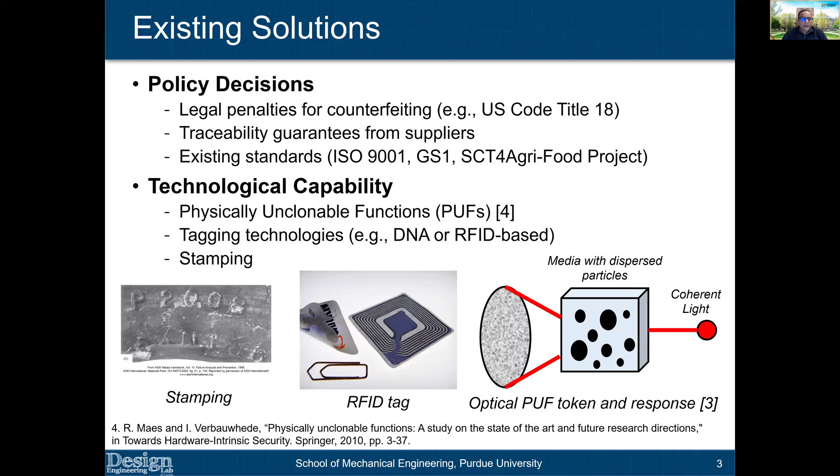The other approach for addressing this problem is more technological. For example, there is this notion of physically unclonable functions, which are functions that cannot be replicated or remanufactured even if we wanted to. Even if we knew exactly what the microstructure of the part is, it is extremely hard to replicate that microstructure exactly. Such an approach can be used to address this problem of counterfeiting.

Specifically, we focus on additive manufactured parts. Recently there has been a lot of work to understand security in the context of additive manufacturing. There are a number of different concerns, for example piracy of CAD files, piracy of process plans. There are issues with sabotage, and of course counterfeiting. There is existing literature on a complete taxonomy of the kinds of different attacks possible within the additive manufacturing domain, and our work fits within this literature.

Specifically, we focus on two areas. One is watermarking, where we add some sort of information inside the part. For example, in the case of images, we can watermark JPEG files. In terms of audio, we can watermark audio files. The second is fingerprinting. These two are related approaches for addressing counterfeiting.

The idea of embedding or hiding information in objects is not new. This has been researched a lot within the digital artifact community. For example, audio watermarking is very common when you purchase MP3 files from the Apple Store or any other online store. Similarly, watermarking of images is a well-established technology, and we can embed signatures within images.

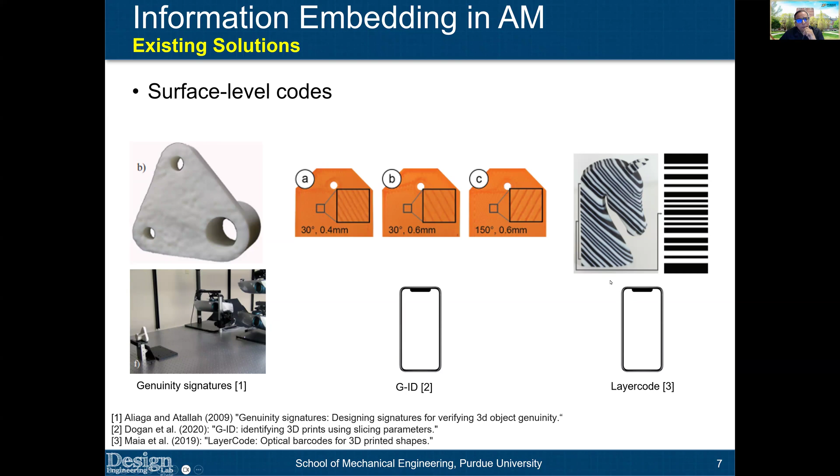Similarly, there are other approaches where we can embed QR codes or barcodes using different materials within the part. There are other techniques where we can embed codes inside the part so they're not directly visible from outside, but through techniques such as scanning or audio-based methods, we can identify which specific code has been embedded in the part.

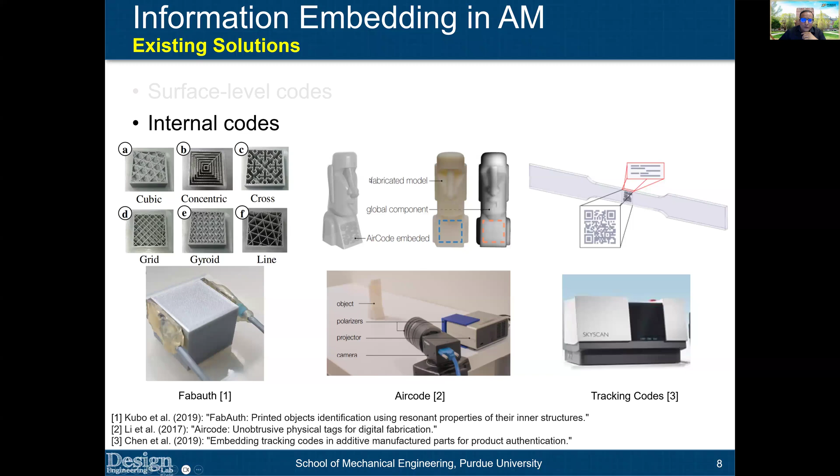So along these lines, our approach is to use the manufacturing process to embed such information within parts. Some key challenges in existing approaches are that modifying the structure of the part inside it also affects its properties. We want to make sure the embedded information doesn't affect the functionality of the part, and that embedding it doesn't require any modifications or extra steps in the manufacturing process.

Considering these two objectives, our primary task in this paper is to define an efficient and reliable scheme for embedding information, and to figure out how to maximize the amount of information that can be embedded inside the part. We refer to this maximization as the information capacity of the part, considering the process capabilities and how the part will be used in real usage.

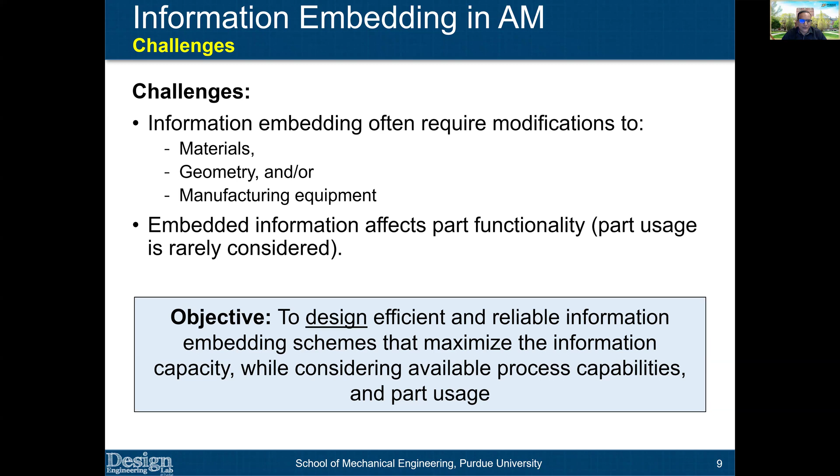Our proposed approach is to use manufacturing process control, particularly additive manufacturing process control, to achieve information embedding. We view information embedding as a noisy channel coding problem, similar to how it's used in information theory, where we think of the part as a carrier of information. The information is embedded when the part is manufactured, and we read that information later, maybe after manufacturing or after the part has been used for some time. We think of the part as the channel carrying that information.

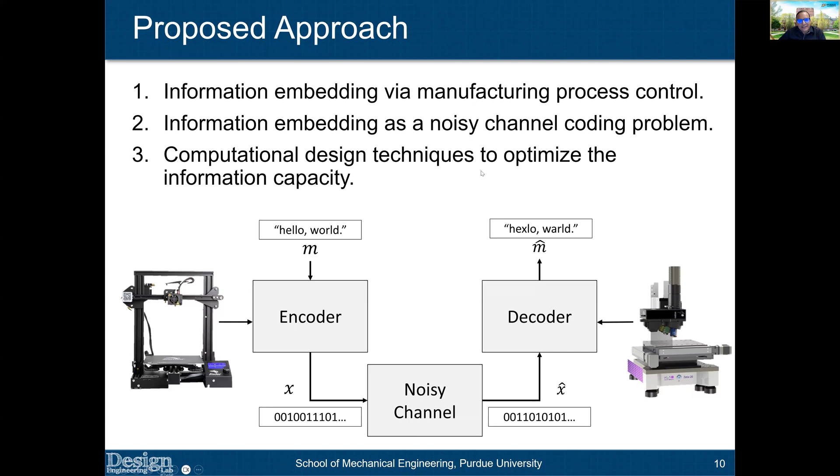When we embed some information, let's call it message M, we want to read that message later, but it may get modified during manufacturing or usage. So we try to maximize the probability that we can read the same information that was embedded earlier, since there may be different effects during usage that modify it. Finally, we want to come up with computational design techniques to optimize the amount of information the part can carry.

Our proposed approach starts with a CAD file, then decides what information to embed. Specifically, we look at embedding information on the surface of the part in the form of either barcodes or 2D QR codes. That information is coupled with the manufacturing process plan, for example a G-code, to update the G-code in a certain way. That updated G-code is then sent to the additive manufacturing equipment, and we print the part.

This process of going from the CAD file and adding that information is referred to as the information encoding step. Once the part has a certain signature embedded in it, we go to the decoding step, which could use optical scanners, profilometers, or many other different ways to read the embedded information. We show how image analysis can extract the message, and what sources of uncertainty come up in the process, and how we account for that uncertainty to figure out the maximum information content of the part.

If we're able to put some information in during the encoding step, and we're exactly able to identify the same information in the decoding step, then there is no error in the entire process.

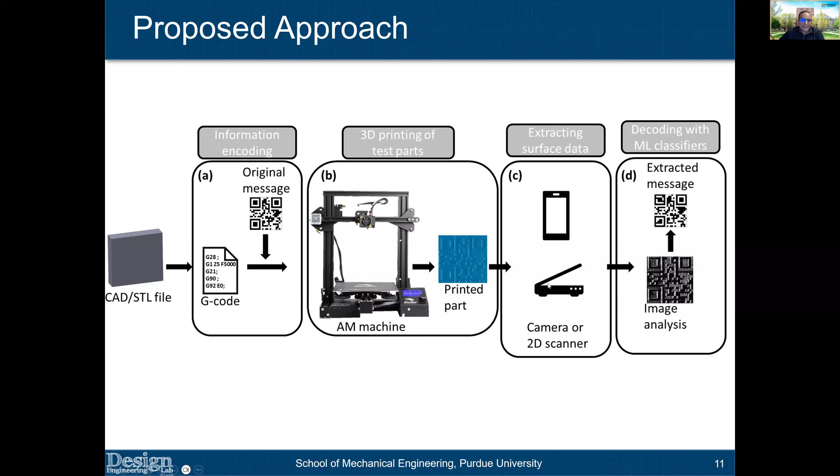Let's say the information capacity is 1, which means I put in a bit, 0 or 1, and I receive the same bit out. However, if there are any errors in the manufacturing process, or in the decoding process, that bit 0 may be read as 1, or a bit 1 may be read as 0. This error may reduce the capacity we can have in that part, so we want to quantify what that information capacity is.

Specifically in this paper, we use the speed of the head as a way of embedding information. If you look at this example part at the bottom, there are two different types of features you would notice. One is shiny blue colored, and the other is some rough surface. We achieve these kinds of patterns by speeding up the head in certain parts of the printing process.

And then slowing it down in other parts. When we are speeding up, we get one type of feature, and when we are slowing it down, we get another type of feature. These two phases we refer to as bit 0 and 1, and that's how we achieve this information embedding of the bits of 0 and 1. Our approach here is using speed of the head.

Now, there are various other ways in which we can achieve different types of signatures. For example, in some of the prior work, we have used vibration motors, where we activate the vibration motors attached to the frame at certain points in the printing process, and that induces certain types of signatures. So there are many different ways in which we can achieve different features and embed information.

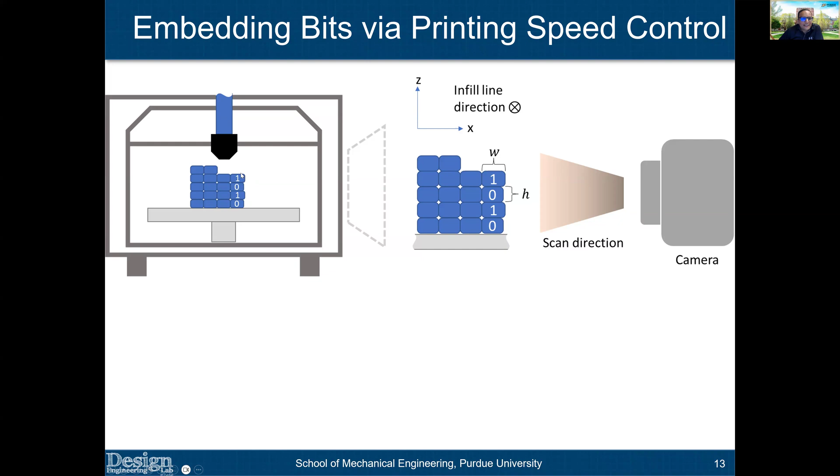So in this particular paper, we focus on speed as the variable. This is another depiction of how or where that information is getting embedded. On the right-hand side is the surface of the part that is getting printed, and when we slow the machine down, we get this larger bead size. This figure shows the effect of speed on the size of the bead.

So for example, when we slow it down, we get this bit 1. But when we speed up the head, then we get this bit 0, which you can see in these experimental results. And that gives the surface a specific signature with the information that is embedded.

So our information encoding scheme consists of 5 steps. First is to generate the message. Now, this message can be just some sort of a binary string, or it can be any other type of alphabet—for example, hexadecimal—then we could come up with different ways in which you can embed information. But here in this paper, we only focus on binary strings.

And we focus on generating these randomly because we want to be able to embed any information that the designer would like to add to the part. Then using this, we determine what the encoding parameter should be, which means what should be the speed of the head which corresponds to bit 0, and what should be the speed of the head which corresponds to bit 1. We come up with the optimum combination of these two speeds, along with the width of each bit.

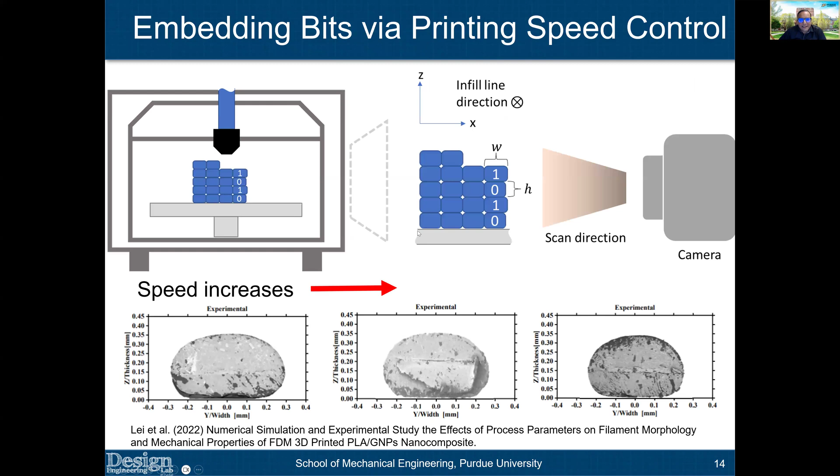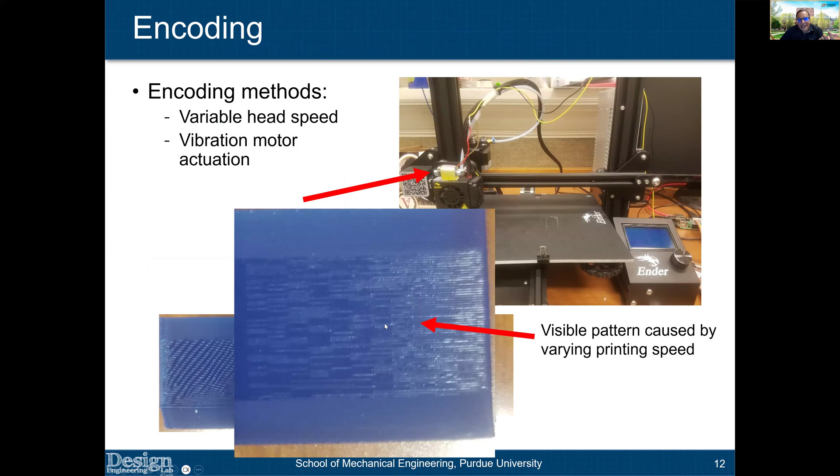So in this previous slide, for example, here we have this as the bit width. As you can see, that's the width we're using to quantify a certain 0 or 1, but that can be changed. We can have a smaller bit width or larger bit width. If we have a smaller bit width, then we'll have more information in the part, but if we have a wider bit width, then we'll be able to encode less information. The advantage is that the probability of reading that bit would be higher.

So once we choose the encoding parameters, the next step is to map that code to be embedded across different layers, and then modify the outer layer speeds for the G code, and then print the part. Here is one example of the kind of part that we could print.

So this is just an illustrative part to assess the impact of different speeds.

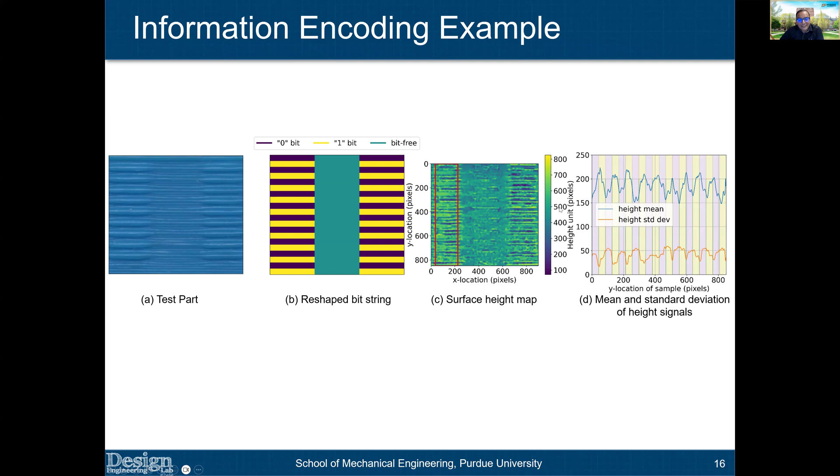In terms of the decoding process, again, as I said, we could use different ways. We have used a simple paper 2D scanner. We have used a camera on a cell phone. We have also used an optical profilometer to assess the impacts of different reading techniques. Clearly, different reading techniques will have different levels of error associated with them, and that affects how much information we can embed.

So the steps in the decoding process are: we start with the part, we scan it, and then we perform some image processing techniques such as noise removal, thresholding, and then we classify each point on the surface as either 0 or 1, or a misclassified bit where we are not able to decide whether it's 0 or 1. That is what is used to calculate how much error we have in the overall part.

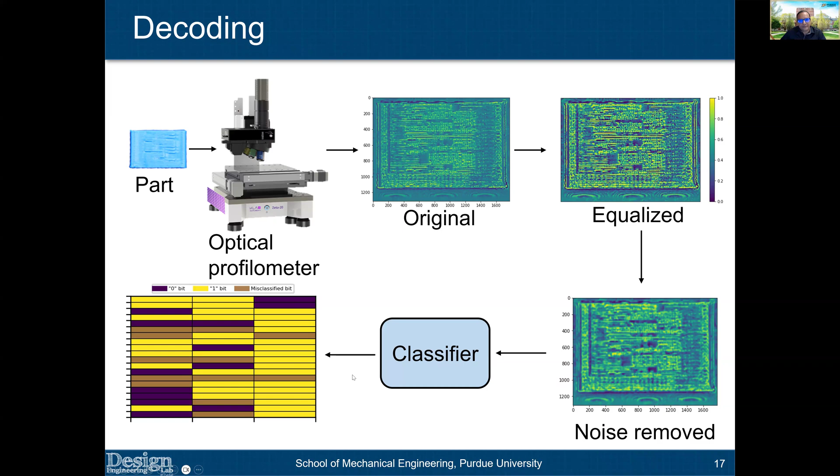To come up with the optimum values of the two speeds, we use design of experiments in terms of the different differences in the speed. So what really matters is not the absolute values of the two speeds for 0 and 1, but the difference between the two speeds. The higher the difference, the more likely we are able to characterize the bit accurately. And the lower the difference, the lower will be the difference in the surface profile for the two regions, and then the higher the error in that.

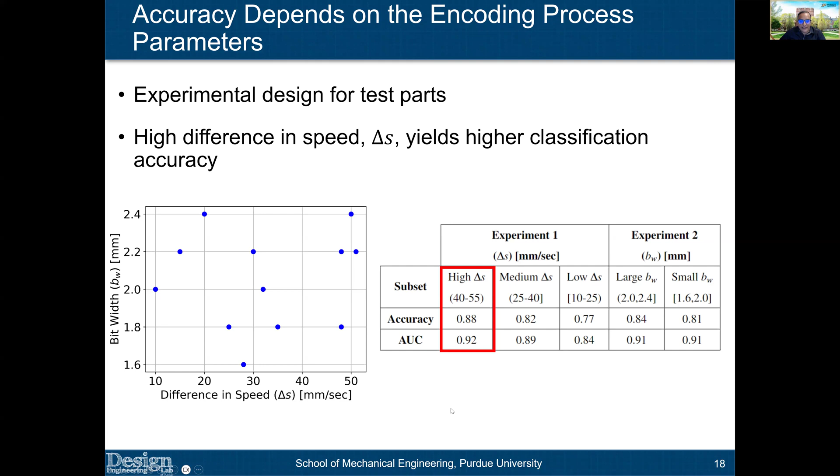And then on the y-axis here, we also experimented with different bit widths. What we found was that the difference in speed has a much higher impact on the classification accuracy compared to bit width. So we focus on using the best value of delta S in order to make the decision.

So then once we come up with the optimum values of the two speeds, then we start embedding 2D signatures like the QR code. Here is one example of a QR code that was printed on the surface of this plastic part. As you can see here, we are using a 2 by 2 millimeter region as 1 bit, and this corresponds to 1 bit.

And we are classifying this region as either a 0 or a 1, and that corresponds to this region in this particular part. So this would be 1 bit, this would be another bit, this would be another bit, and so on. And we are using that to then assess whether we can read this QR code accurately or not.

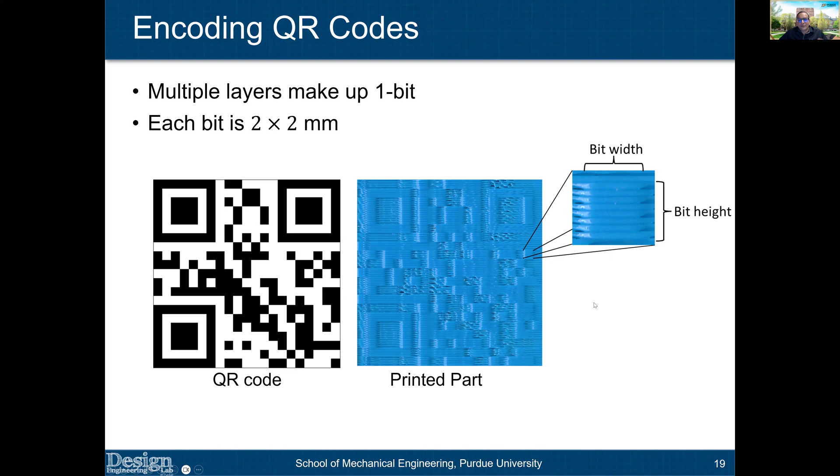Now, clearly, we can have different sizes of QR codes with different error resistance. Here, we are mainly trying to assess what should be the minimum size of this bit, what should be the minimum difference in the speed, so that we can have a good part, but with reasonable accuracy with which we are able to assess whether the bit is 0 or 1.

Now, in terms of classification, once we read the image and then we try to classify each region as a bit 0 or 1, we have used several different types of machine learning techniques, ranging from logistic regression to SVM to random forest to CNNs, convolutional neural networks. And what we found was that in this case, the convolutional neural networks had the highest accuracy. So in this case, we were able to have an accuracy of about 98% in the parts that we tested.

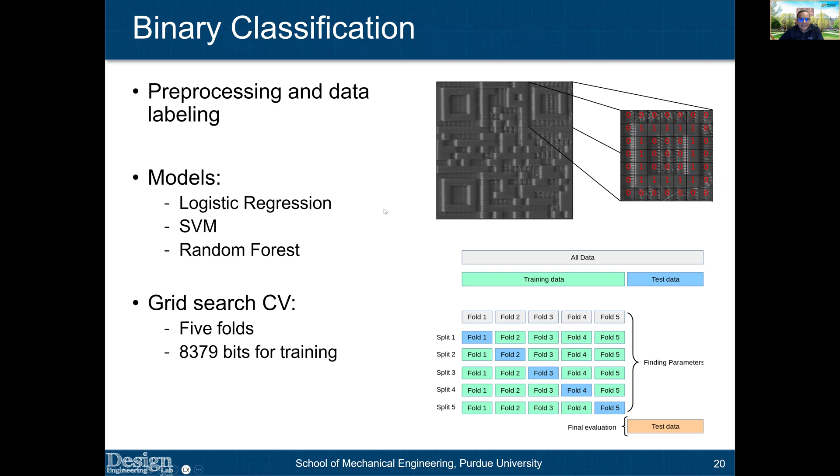One thing I'd like to highlight is that when we're training the CNN, we are not training it for the entire QR code, because that would require a lot of different prints to train the CNN. Instead, we are training it a bit at a time, for smaller regions, like the region shown earlier. Each image printed with a single QR code gives us a lot of training data, like 400 or so images directly usable for training, which reduces the number of parts we have to print to train this CNN.

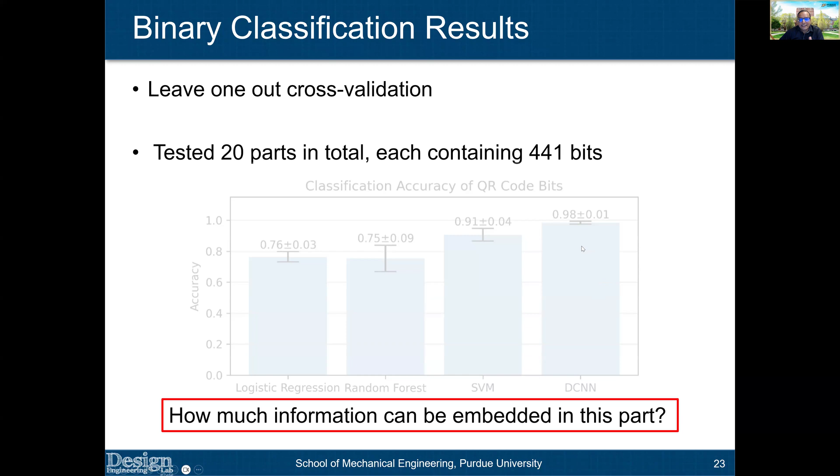So we go with the CNN as our classification method. The next question is, what is the maximum amount of information that we can embed in this particular part, given that we have fixed our speed and our way of estimating the bits, like we have fixed CNN as the method for estimating. That's where we again go back to information theory, using Shannon's theorem and quantifying the channel capacity.

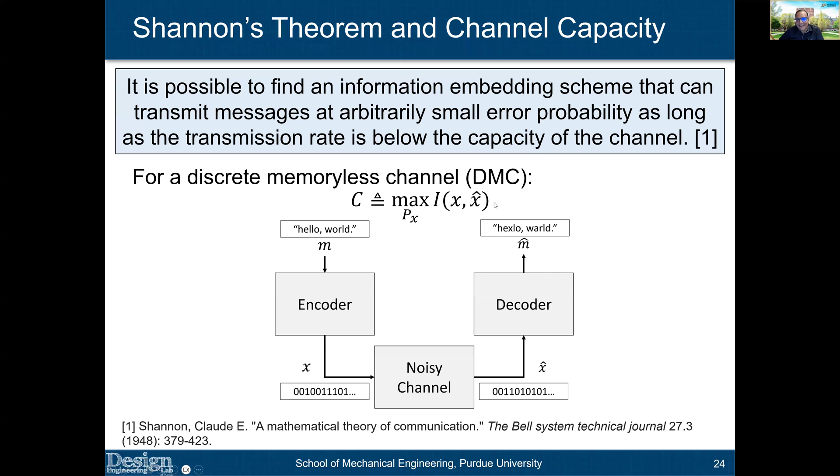The channel capacity is basically the maximum amount of information that can be embedded using a particular channel, where we are putting in some information X and reading out some other information X hat. So we use that as our objective function and try to maximize that measure of information capacity in the channel.

There are various different types of channels, and the channel that we model this as is the binary asymmetric channel. In a binary asymmetric channel, you're sending a binary signal, a 0 or a 1 at a time. That 0 may be read as a 0, or it may be read as a 1. So when you're sending a 0, it may come out as 1, and that's the error in bit 0, represented as epsilon 0. Similarly, if you're sending a 1 and we receive a 0, that's the error in bit 1, represented as epsilon 1.

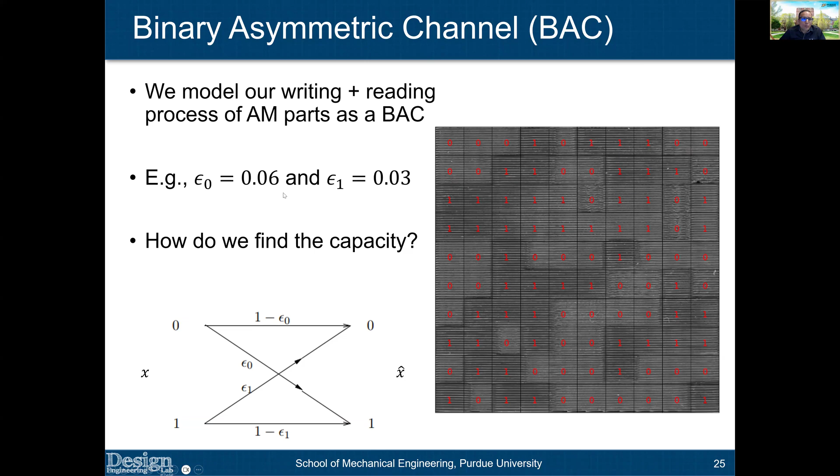Now, these errors may be equal, in which case it's a binary symmetric channel, but these errors may be different. In this particular case, we found that our error rates were actually different when sending a 0 versus sending a 1. So we use this BAC, the binary asymmetric channel, which can be used to calculate the capacity of the binary asymmetric channel. This is the formula using entropy.

What we see here is a plot that shows the information capacity as a function of the two errors, where epsilon 0 is the error in 0 and epsilon 1 is the error in 1. The three points shown correspond to different differences in speeds for the two bits. If this difference in speed is 10 for bit 0 and 1, we notice that the error corresponding to 0 is about 0.8, and the error corresponding to 1 is about 0.35 or so. Similarly, if the difference is very high between the two speeds, we find that the errors are low, epsilon 0 close to 0.4 and epsilon 1 close to 0.1.

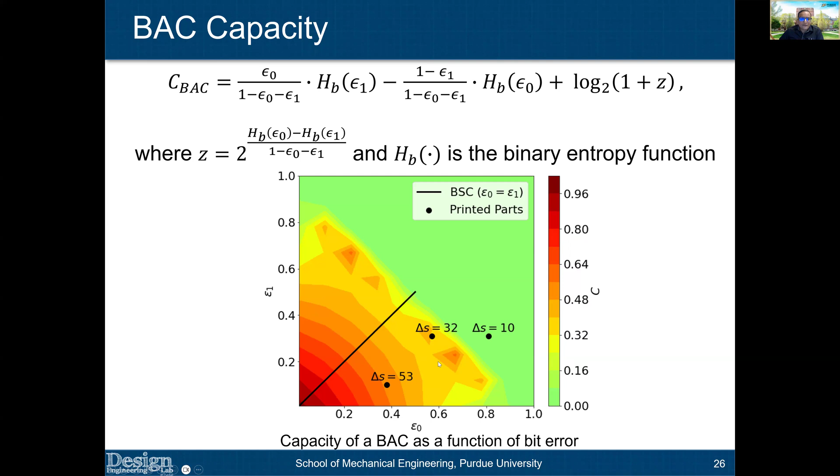Using that information, we want to figure out what parameters we can control as designers and manufacturers to maximize the information we can embed. The optimization we're doing here is to maximize BAC. The three variables we have for maximization are x1, the speed for bit 0, x2, the speed for bit 1, and x3, the width of the bit.

The lower the bit width, the more information you can pack in the same region, but the higher the possibility of error. What we found was that in this optimization problem, we can actually decouple the two optimization problems, one for x1 and x2, and the other for x3, the bit width. So we can do these two optimizations independently.

For this optimization, we use sequential Bayesian optimization techniques that have been very popular in the design literature. We start out with a set of points, and we use those points to then fit a response surface.

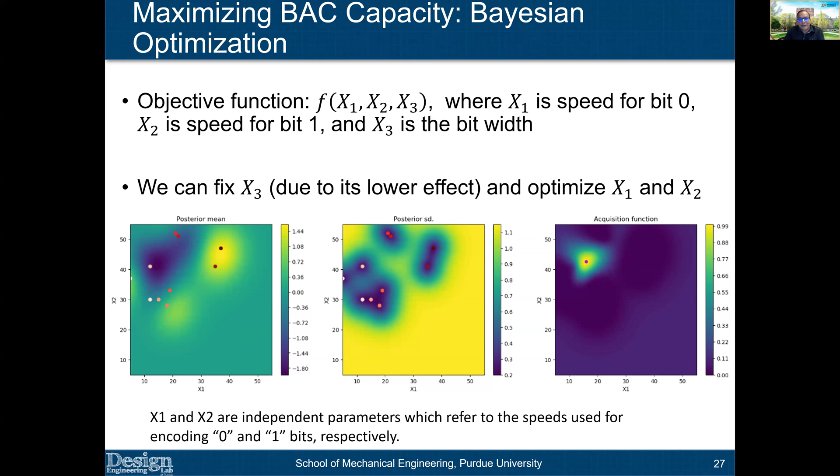We pick the next point based on where we can maximize the improvement in the objective function. Using that, after 20 iterations, what we found was that the optimum value of x1, the speed for bit 0, and the optimum value of x2, the speed for bit 1, are somewhere in this region. Since it's a symmetric problem, both of these regions are converging to the optimum value.

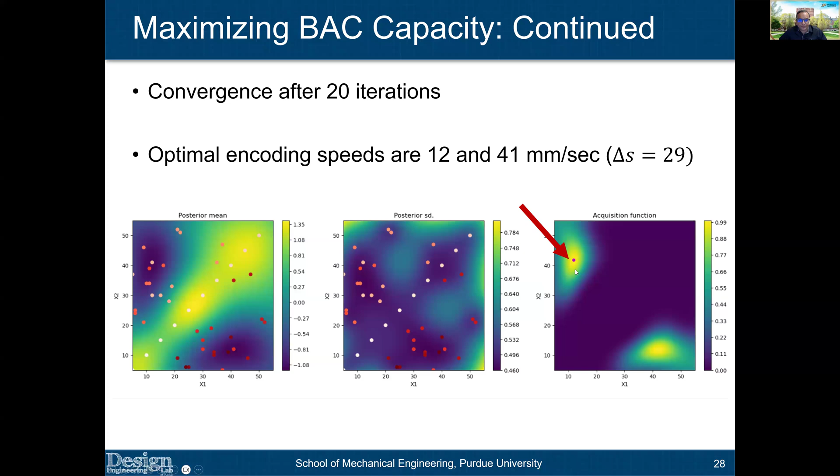So speed x1 is close to about 12 or so, and speed x2 is about 42 or so. This is the optimum design of these parameters: S0 is 12 and S1 is 42. We use that to print the part just to show what kinds of differences you can see in the features.

As you can see here, we are clearly able to see the differences between bits that correspond to 0 and 1, for example right here. Versus if S0 is 9 and S1 is 21, here it is a little bit harder to figure out which region corresponds to bit 0 and which corresponds to bit 1.

In fact, the average accuracy for this is 0.97. And if you go to S0 of 6 and S1 of 25, the average accuracy is lower, at 0.93. So this is just to compare and show the effects of the differences in speed.

Now, if surface finish is an important factor, then maybe this design would actually be better, but only from the perspective of one objective, maximizing information embedding capacity, would this set of parameters be the best. So again, this shows the trade-off between surface quality and information embedding capacity.

Here, in this particular case, the information capacity comes out to be 1, which means that every time we read this, we are able to accurately assess each of those regions as being 0 or 1.

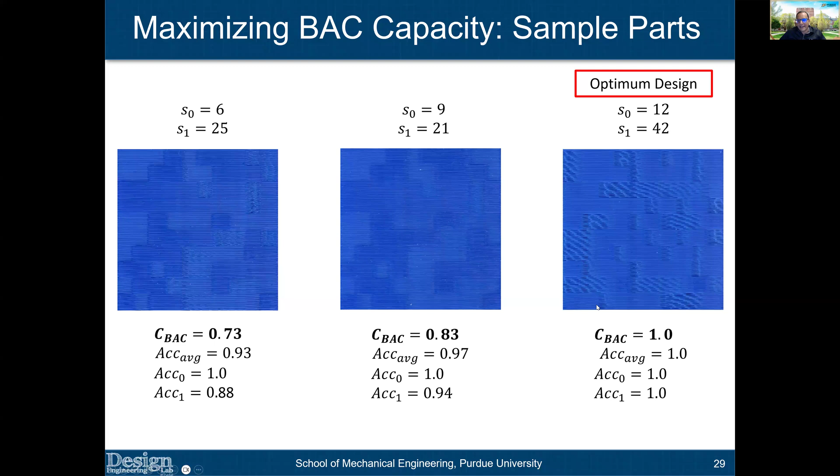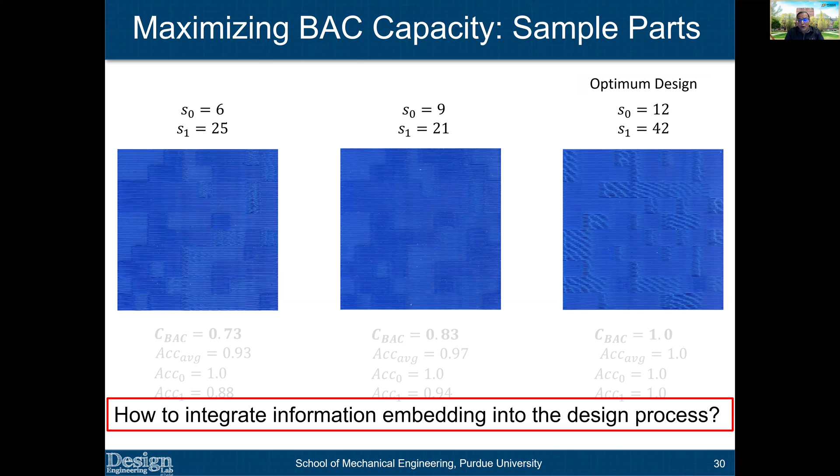So far we have only looked at optimizing for the information embedding capacity. We haven't really incorporated the functional characteristics or the objective for which the part is being designed. For example, we haven't looked at surface roughness, or the strength of the part, or what impact this could have on fatigue properties.

So our current work is focused on trying to look at these multiple objectives — saying, okay, what if we are trying to maximize stiffness or minimize compliance, while at the same time trying to embed information in the part? Can I come up with a multi-objective optimization problem where we maximize information capacity while also minimizing compliance?

Here we are trying to say, okay, what if I wanted to embed a 2D QR code or any other code in this part? Where should I place that code? And what is the maximum size of that code that could be placed so that I can achieve both of these objective functions?

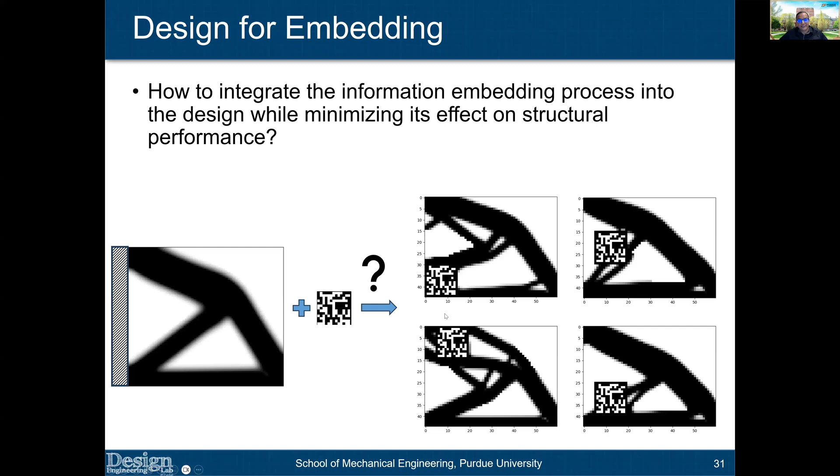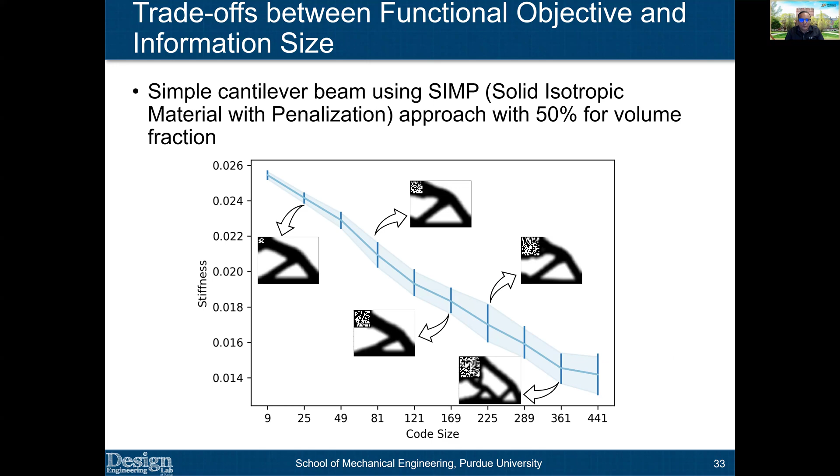The main message here is, in addition to embedding information, there is a need to bring in the physical properties and the functionality of the part, and there is always a trade-off between the two that needs to be taken into account.